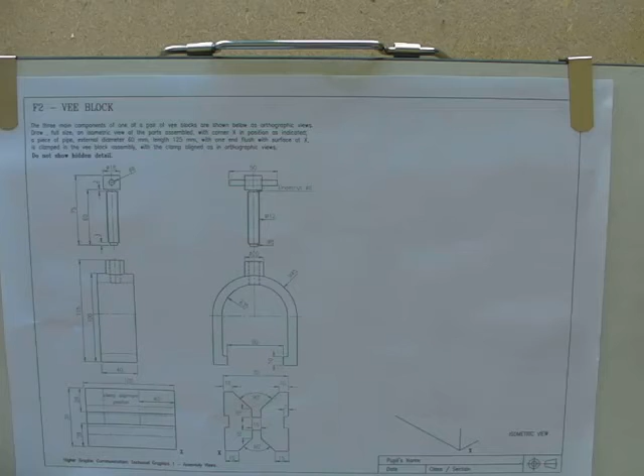Okay, this drawing is an isometric drawing. It's quite a complicated drawing. It's got different parts which have to be assembled, that's why it's called an assembly. It's an isometric and it's to be drawn to the dimensions given here, so you can't just lift the dimensions from the information that's here. What I would advise you do before we do anything is draw this here, over here, the correct size, and you'll realise why when I move on to some of the other parts of the drawing.

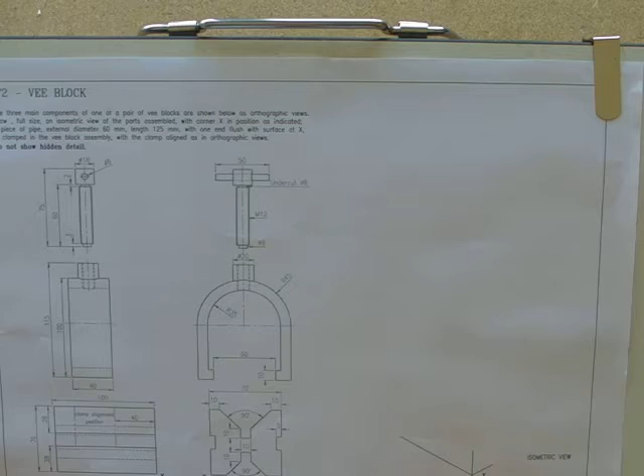So all I'm going to do is just choose a space here and I'm going to draw out this correctly. In fact, what I'm going to do is draw out the top half of it from really there up, and as I say, there's a good reason for that, which you'll see.

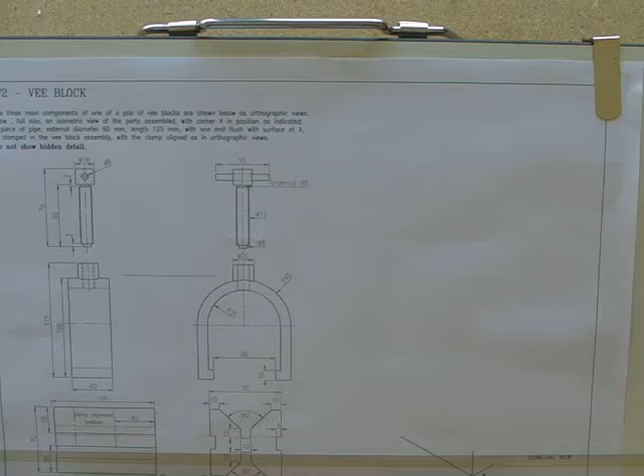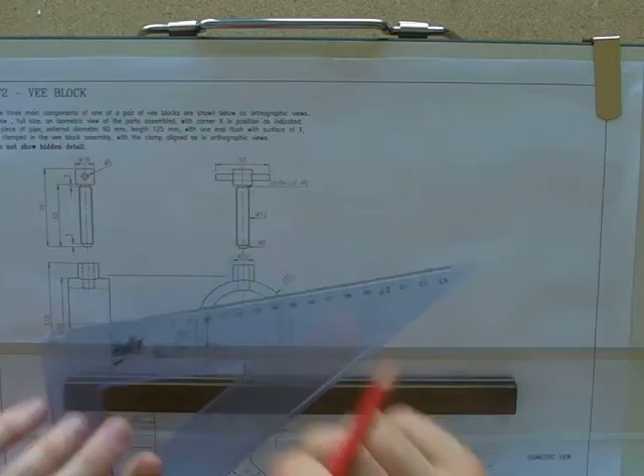Now width wise it's 70 wide, so I'm just going to build this up. Now you can see it's quite wide, so I have to make this line a bit wider, and mark it out to 70. So there, there. Now the reason for this is just that when we come to do some of the work later on, it would be good to be able to read off some sizes from this drawing.

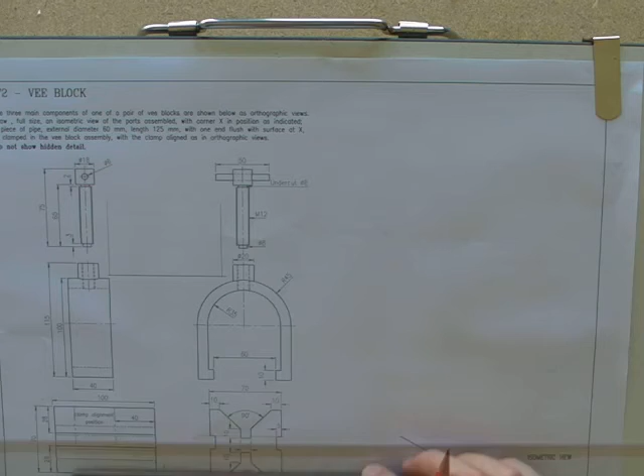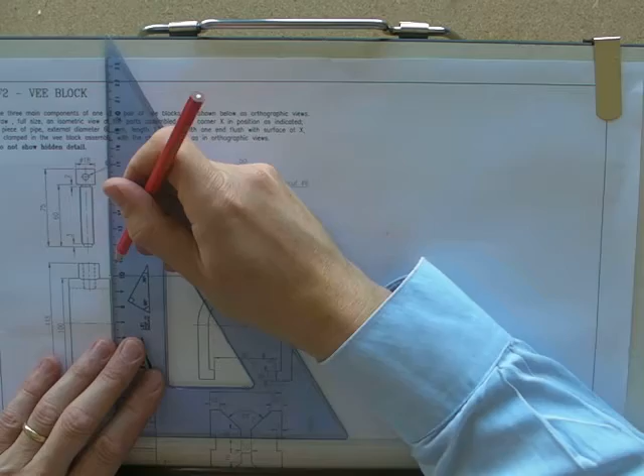Okay, so just projecting up there. Now, the height of this bit has to be worked out. If you look at this here, you can see that from there to there is 28, so we have to measure up 28. You can notice quite often when I measure using the set square, like I'm starting at 10 there, so I can go 10, 20, 28. It's just easier than always going for the very edge of it. So I'll just build this up.

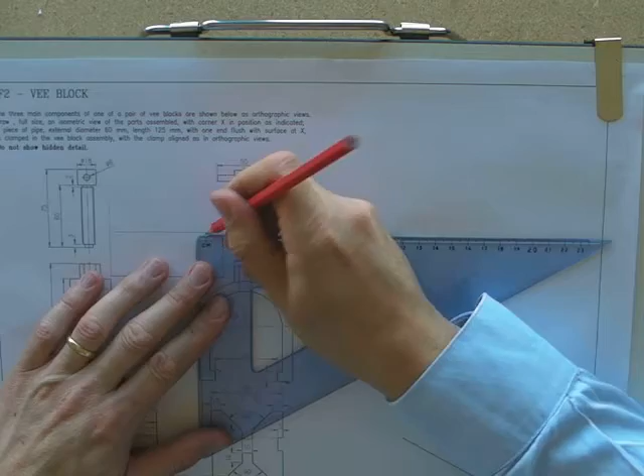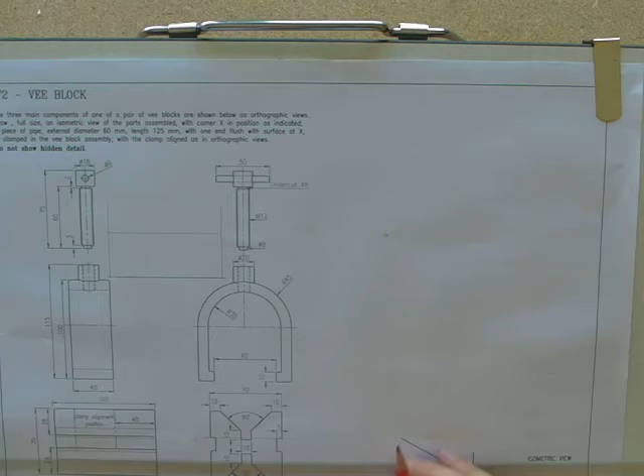Okay, this wee bit here is 10 wide, so measure and mark 10 there and 10 here. So that bit's there, and then you've got 10 there, 10 there. This bit in the middle is symmetrical, and you've got 10 in the middle. So if you take 10 off of 10 and 10 off of 70, you get 50. So that means between here and here is 50. So I could actually just mark that on and say, right, that's 50 there.

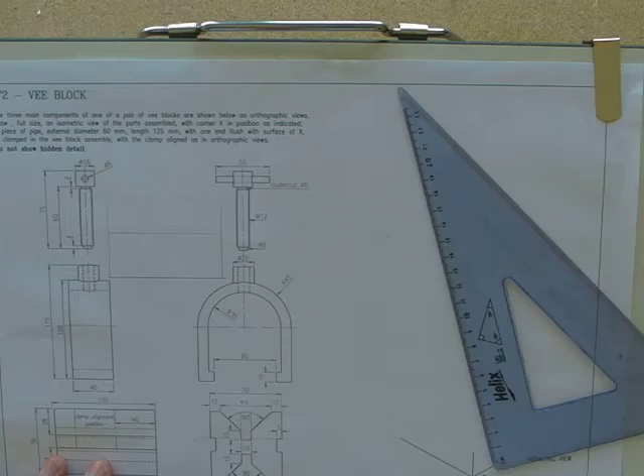Okay. If you've got 10 out the middle, that means the distance between here, let's mark these bits on, that means the distance between here and here is 20. So I'm just going to mark that size on. So it's 20 to there, and then from this side it's 20 to there. That makes the middle 10, which it does.

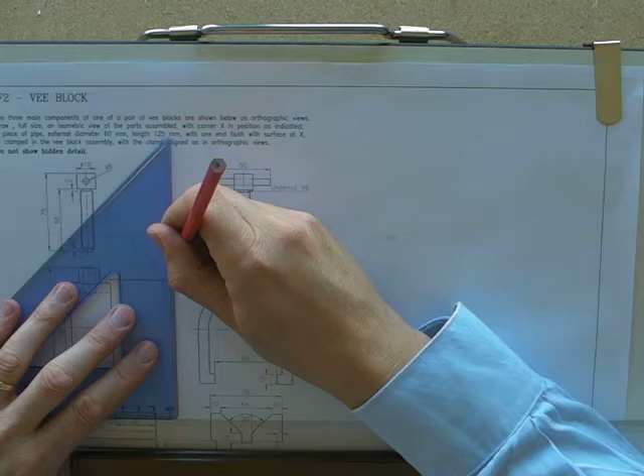This is a 90 degree between here, which makes this angle here 45 degrees, trust me. So that means that at that point we come down, at this point anyway, we come down 45 degrees. And here we come down 45 degrees. And if we go vertical here and here, then that's the correct size for that part. Okay, so I'm just going to firm this in a bit. As I say, very soon, when we're completing the rest of the drawing, you'll see why that's a significant thing and an important thing to do.

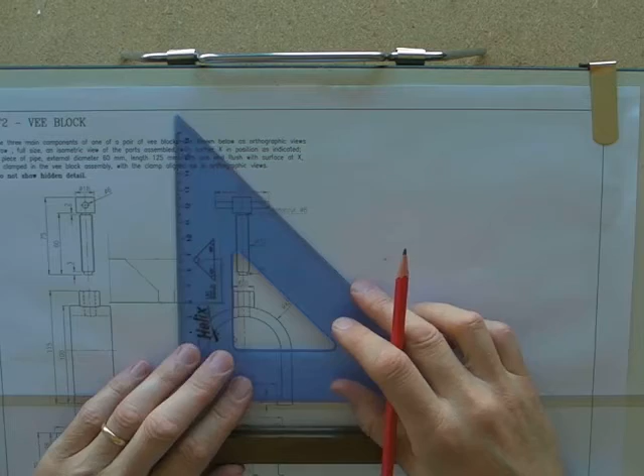Okay, the drawing board's just slipped. I'm just going to fix it. Okay, let's see, make sure we can see everything that we need to see. Right, so we've got that bit drawn in.

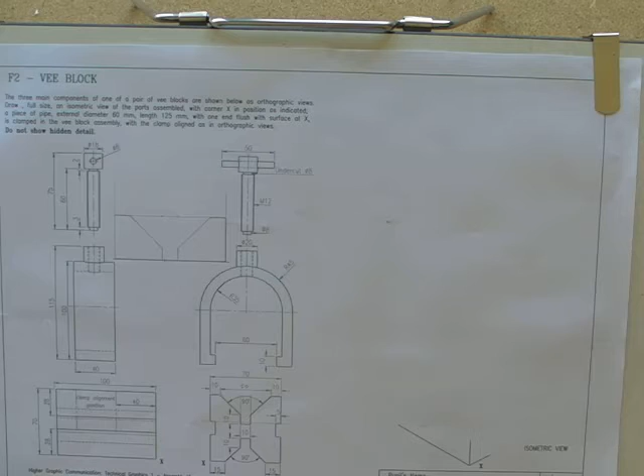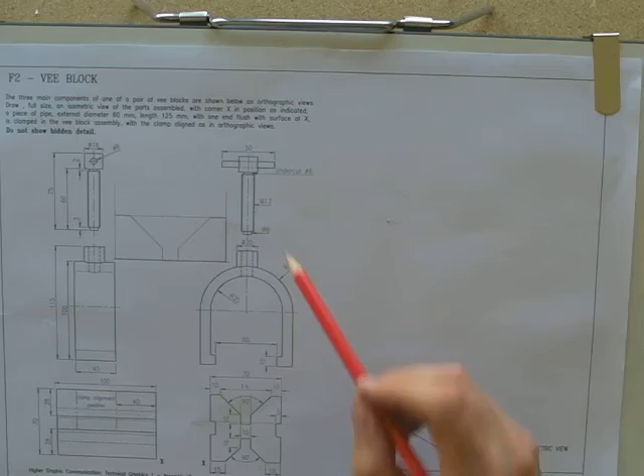Right, this is where the whole thing's going to start, and it makes sense to draw out the main body of this. You've basically got this part here, which is the main block, here and here, and then you've got the clamp assembly here, and this clamps onto here in this space, and then you've got this screw part which screws into there, and whatever's inside the clamp will be pushed into the V and clamping it down.

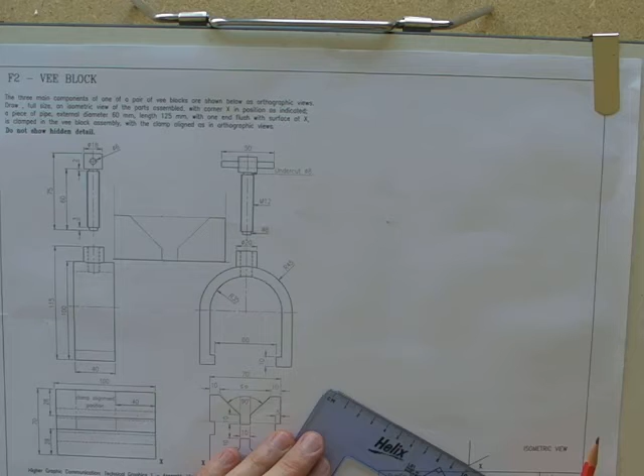So I'm going to build up the block. There's a block there, information there, it's 100. So all we're going to do is just extend this and measure 100 millimetres. It's pretty much spot on what I measured there. So that comes to there.

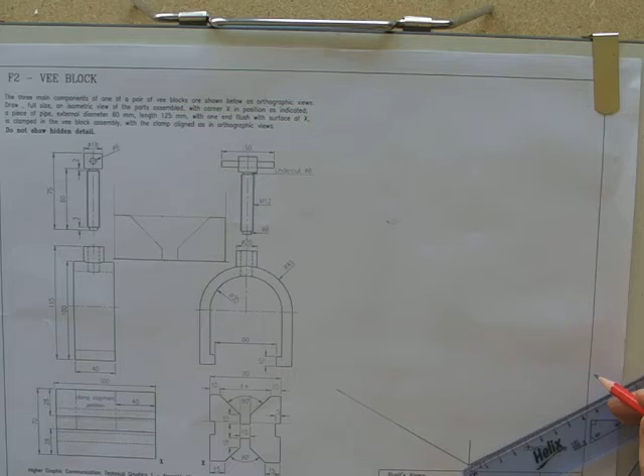And this part goes up. At the moment I'm just going to draw it as a cuboid, and that's 70 up this way. And a wee bit short there with that, so 70 to there. Let's check that. Yep, so 70 to there. And obviously this part goes up. This part goes up. Okay, and remember these should just be these light lines just now. The overall height is 70 as well, so just mark that on.

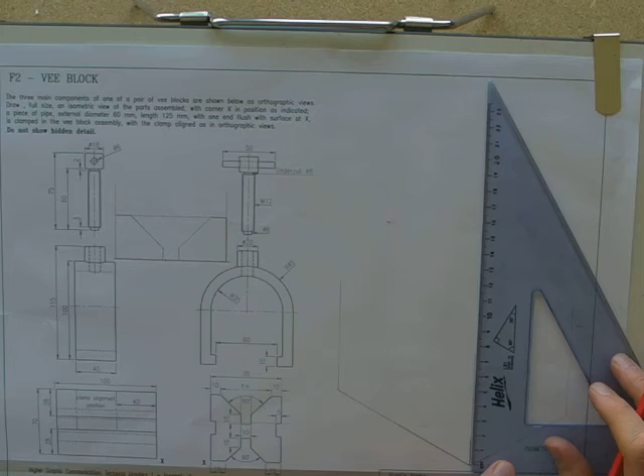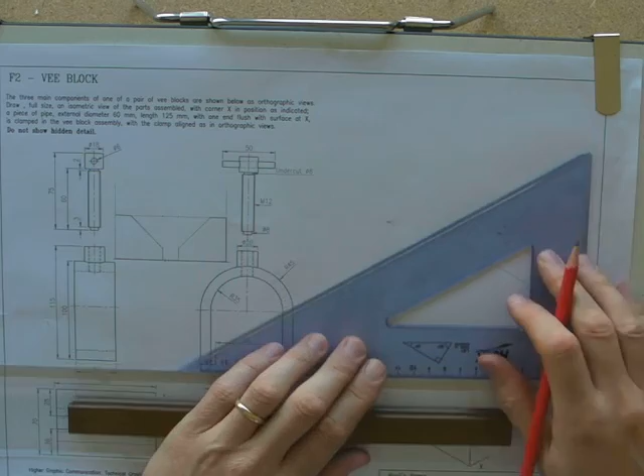I'm just going to finish off this basic shape here, and that gives you an idea of where the block sits on the page as much as anything. Just knock out that wee extra line there so it's clearer. So that's part one. That and that. Get that done, and then we'll move on to the next part.